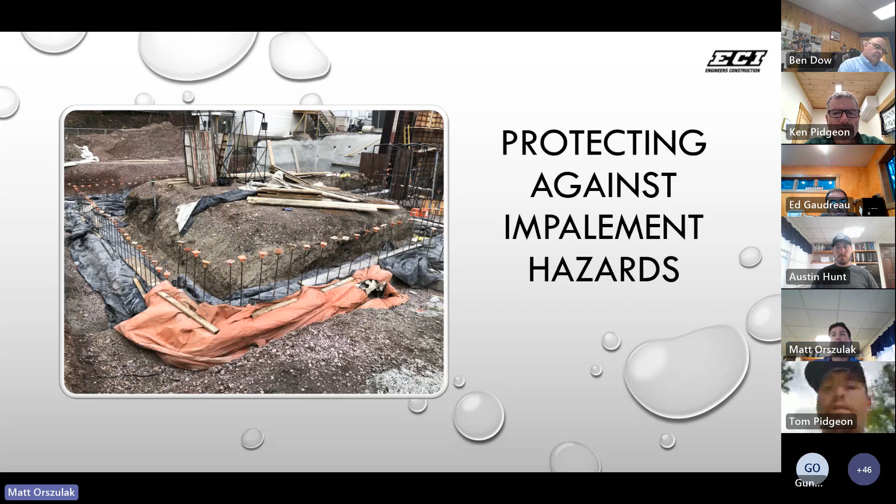So the standard, how it's written: 1926.701(b), all protruding reinforcing steel onto and into which employees could fall shall be guarded to eliminate the hazard of impalement. They changed that about 2006, where it's not just heights, it's also falling onto the same surface, whether horizontal or vertical. Rebar caps should be on the ends of our reinforcement steel. We had a couple questions come up over the last couple of weeks, so we wanted to address that even if it's a horizontal bar, we should have rebar caps on it.

And then the last standard that really applies to what we do is 1926.25(a), which applies to protruding nails, screws, and fasteners. During the course of construction or repairs, form or scrap lumber with protruding nails and all other debris shall be kept cleared from work areas, passageways, and stairs in and around buildings or other structures.

So we want to really make sure that when we're removing or handling materials, we're taking off these nails, making sure they're not protruding hazards for anyone walking or working nearby. The best practice is to eliminate those hazards by completely removing the nail or bending them over where someone can't get cut or punctured. It's an important housekeeping issue, but also hazard identification and elimination on our job sites, as we're doing so much concrete work and rebar work currently on our projects.

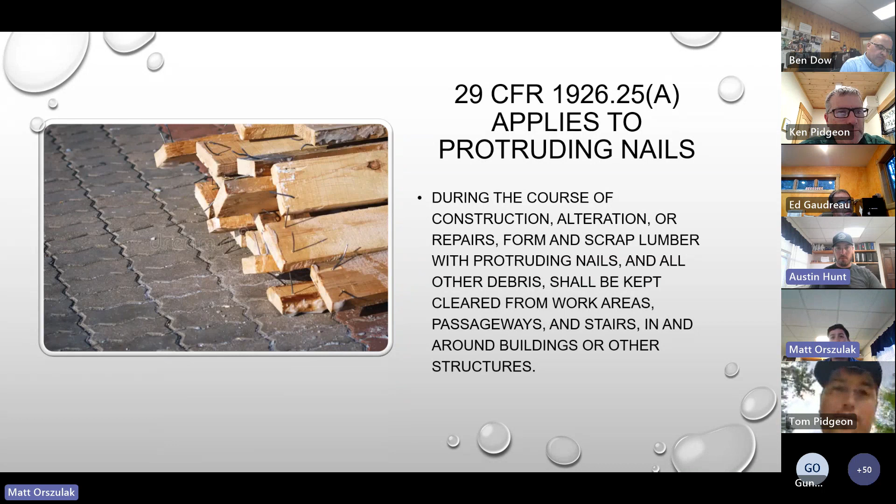Okay, can you clarify that on the horizontal rebar again? Yeah, so if it's horizontal rebar, it needs to have caps on as well, not just vertical. Because you could fall into it, a tripping hazard occurs, and if it's a horizontal bar, you could get impaled through it. So should you have rebar caps on a certain height bar, or am I not really following? There's a letter interpretation in OSHA that the horizontal bar could cause impalement.

It's kind of case by case. They said more than a foot off the ground is okay. The letter interpretation is, if you get bars coming out of the end of a slab, it's obviously less than a foot probably, and that's fine. But if it's an elevated surface with bars coming out, that's an issue.

Yeah, so it's like a tank, like in Middlebury right now we have this arched rebar, and it's about waist height, but it's horizontal at the waist height. So that's an example of an impalement hazard that we would need to have caps on.

And what's the rule? Like you see sometimes people use 2x4, 2x6 to encompass all of them and cover them. Is that acceptable or isn't it? It isn't acceptable. However, there's a little bit of gray area because it needs to withstand a 250-pound kind of drop test. So if it's fastened really strong, similar to the fall protection standard with guardrails, if it's really sturdy and fastened and it can't shift or move, and it's protecting from that potential impalement hazard, then those are in compliance.

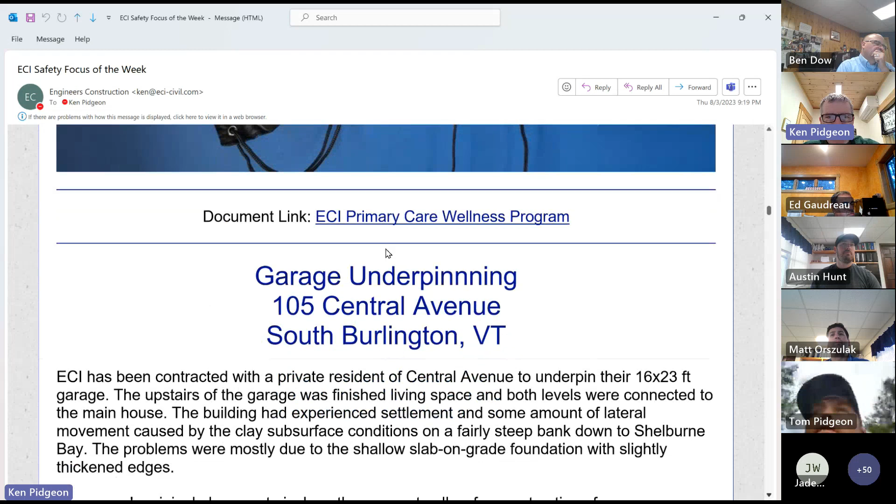And for the project of the week, we are looking at this project of 105 Central Avenue, which was a garage underpinning project. We were contracted with a private residence on Central Avenue to underpin their roughly 16 by 23 garage. The upstairs of the garage was finished living space, and both levels were connected to the main house.

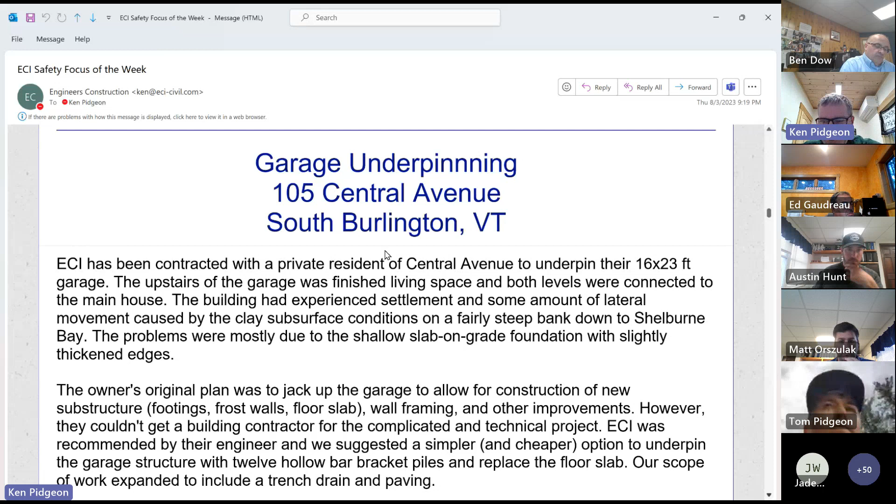The building had experienced settlement and some lateral movement caused by the clay subsurface conditions on a fairly steep bank down to Shelburne Bay. The problems are mostly due to the shallow slab-on-grade foundation with slightly thickened edges. It was just an old garage that was continually built up and improved, but it started out on an inadequate foundation.

If it had frost walls and everything, it would have been much better. So the owner's original plan that they worked out with their engineer was to jack up the garage, allow for construction of a new substructure with footings, frost walls, slab, new wall framing, and other improvements. But they couldn't get a building contractor, because it was a pretty complicated and technical project.

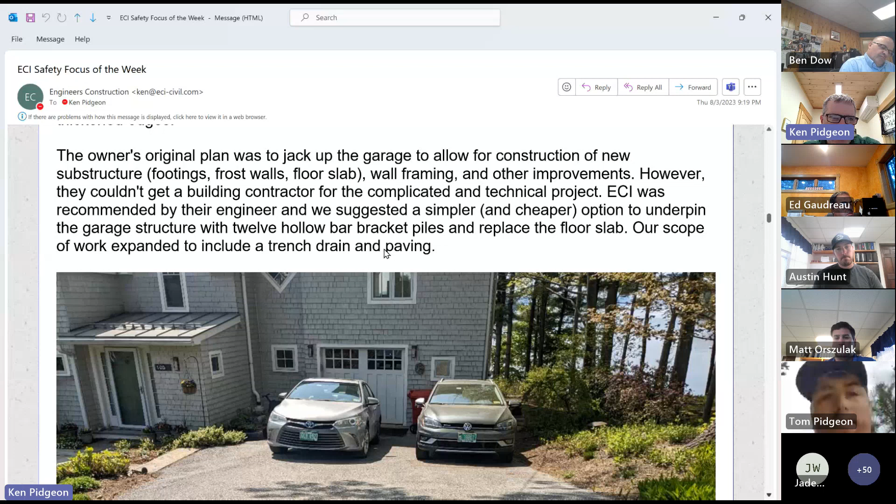It's kind of a tough area in the sense of getting down there and blending in with this really tight-knit neighborhood. So we were asked to come look at it by their engineer, Eric Goddard from Knights, and we suggested a simpler and cheaper option: to underpin the garage structure with 12 hollow bar bracket piles and replace the floor slab. Our scope of work expanded to include a trench drain and paving.

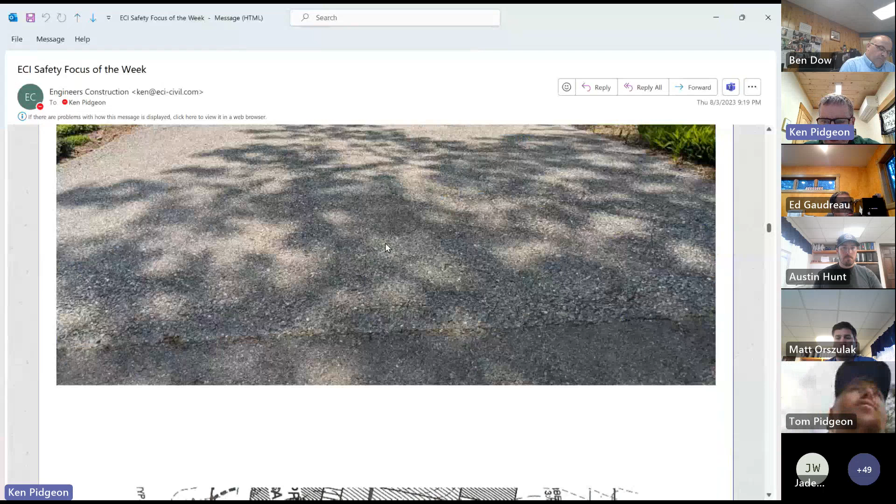This picture is before we started the project. You'll notice a pretty steep driveway from Central Ave down. So obviously there was a water problem going right into that garage, although there was an old trench drain, but it wasn't very effective. Our proposal was just to install these perimeter piles to support the garage, and you see there's a connector to the existing house.

The brackets are manufactured by Earth Contact Products and were specifically fabricated for hollow bar micropiles. We've used them before. However, the brackets are intended to attach adjacent to and under a footing of at least about 12 inches thick. Our situation had a thickened edge slab with only about 6 inches or less of edge for the bracket to engage and for spanning to the next pile.

The key to these is to have it span from pile to pile when you expose everything. An ECI solution to that problem was to attach a heavy steel angle section to the outside edge of the slab with Hilti bolts. The angle section was installed prior to digging in the brackets and helped span between these piles, despite the somewhat fractured concrete slab.

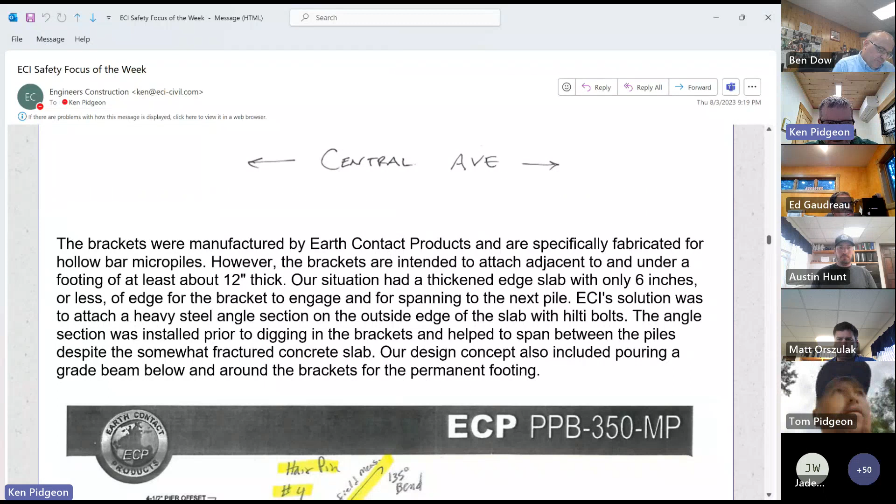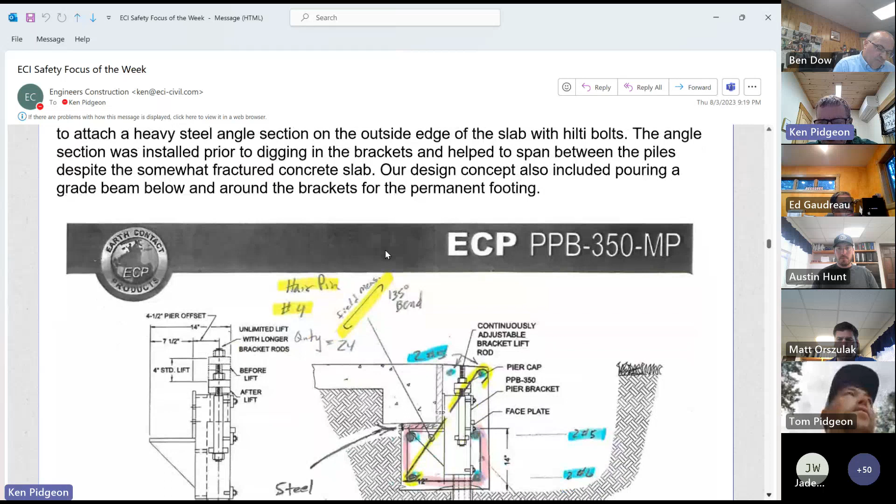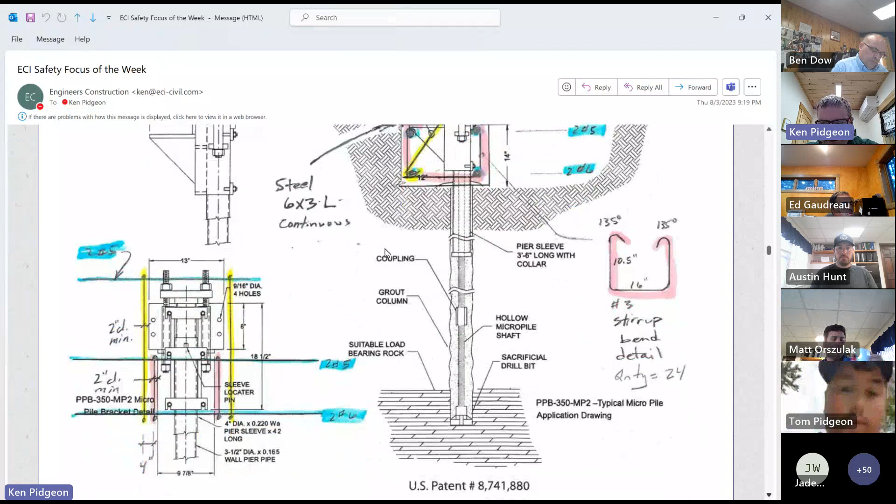Our design concept also included pouring a grade beam below and around the brackets for the permanent footing. This is a marked-up cut sheet from the supplier, and you can see we had this angle - steel 6x3L continuous - sandwiched in between the bracket and the existing footing. Then we encased everything in a grade beam. Got some steel details here.

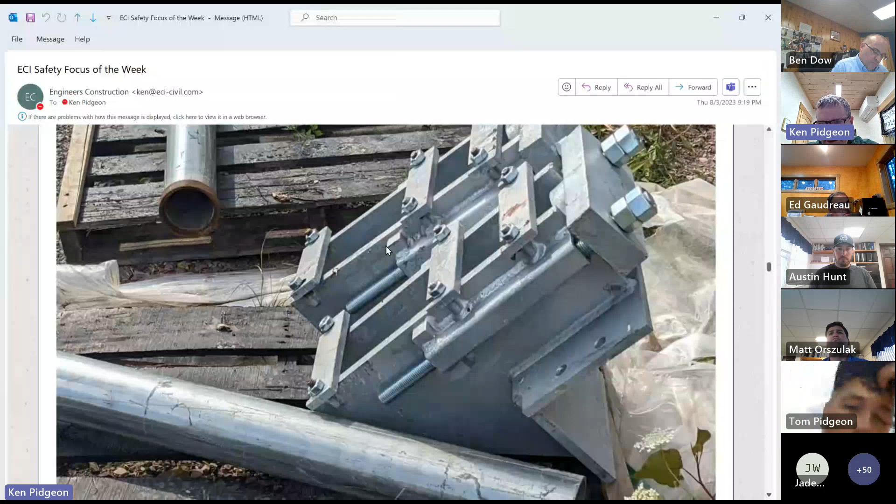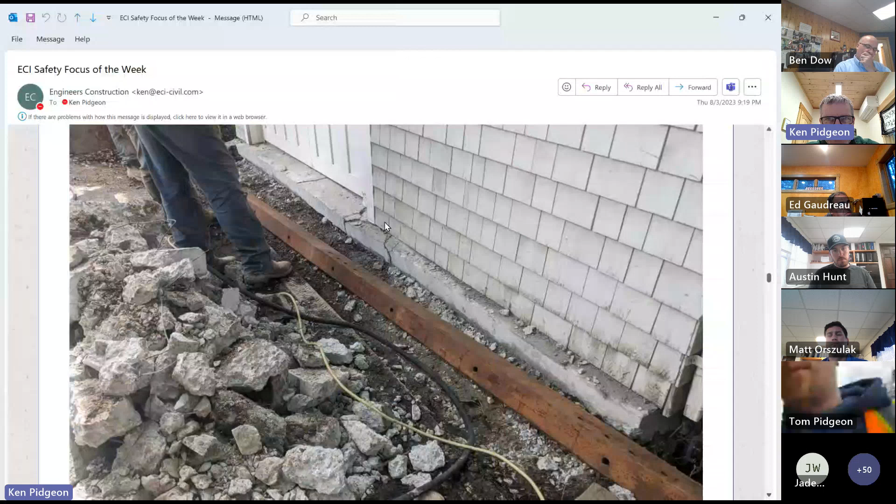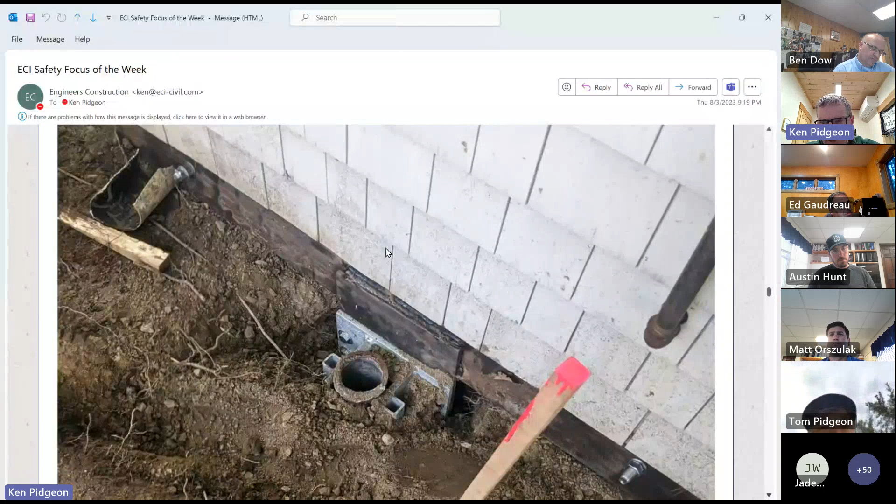This is the angle section. It had to go under the slab - you can see that broken up slab, so you'd have to span across areas that weren't very structurally good. So we put the angle bracket in there. You can see in this photo, we have the bracket installed, ready for a pile, and the Hilti bolted angle in underneath the house slab.

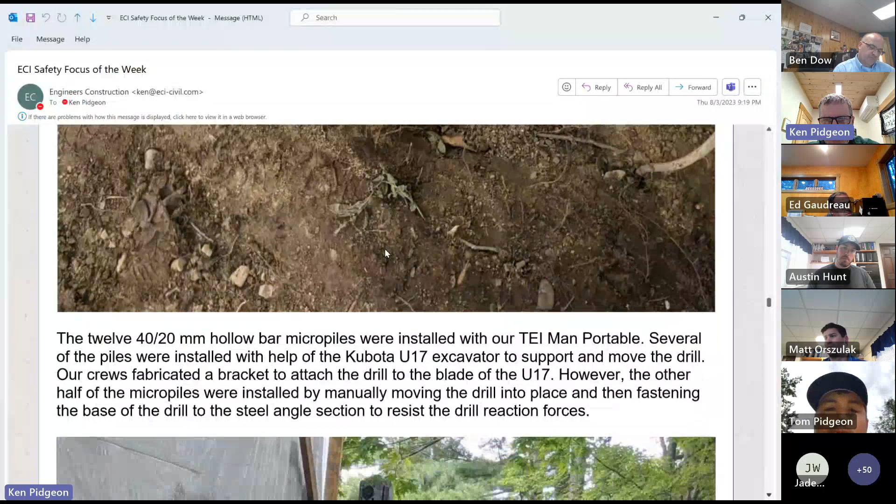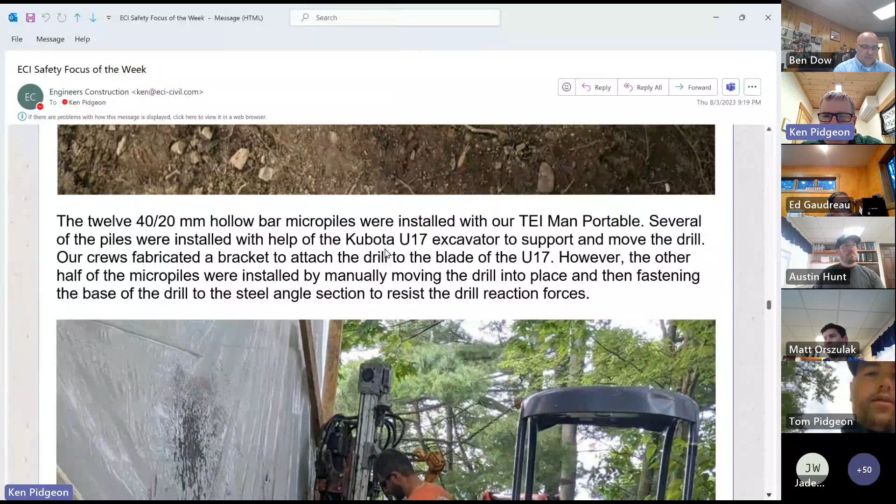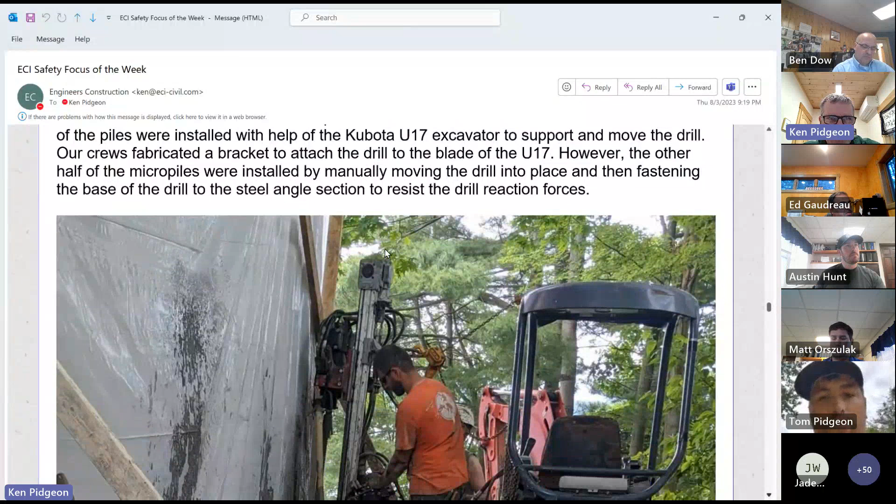We had 12 40-20 millimeter hollow bar micropiles that we installed with our TEI man-portable rig, which has a remote power pack - definitely portable, but still heavy and kind of cumbersome. Several of the piles, because it was so awkward, were installed with the help of our Kubota U17 excavator to support and move the drill. Our crews fabricated a bracket to attach the drill to the blade of the U17. That was pretty cool and good thinking.

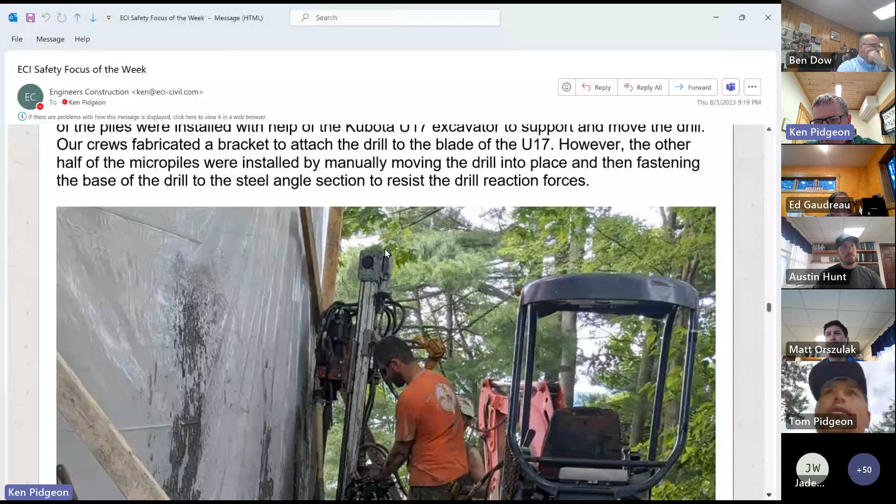However, half the micropiles were installed by manually moving the drill into place and fastening it to the base - the steel angle section - to resist the reaction forces. You'll see why in a minute, because right here we didn't have a whole lot of room, but we had enough for the little U17, drilling against that one side, the north side of the house I guess.

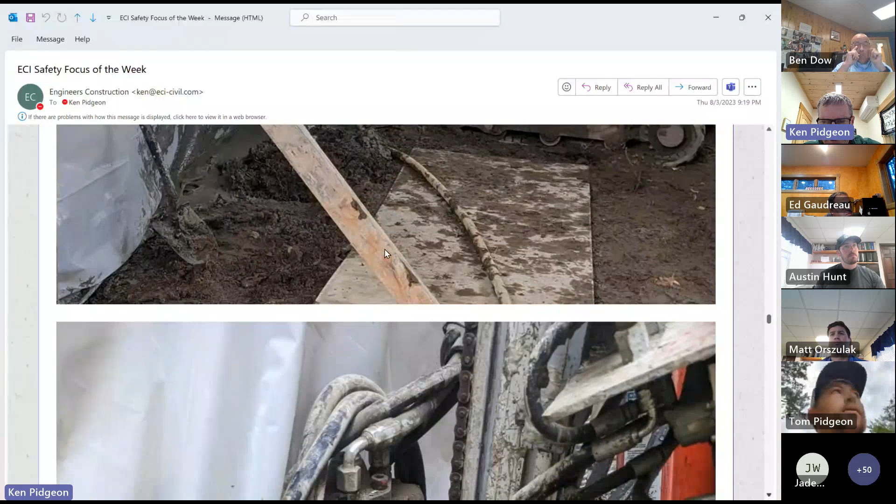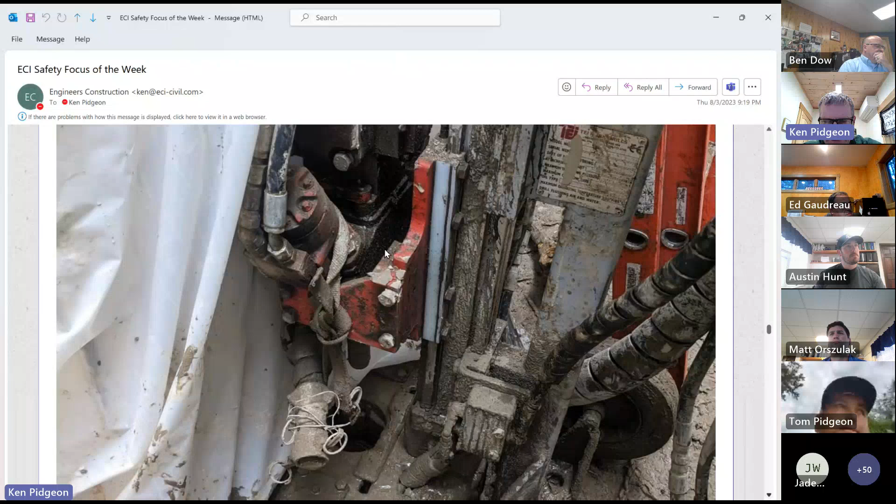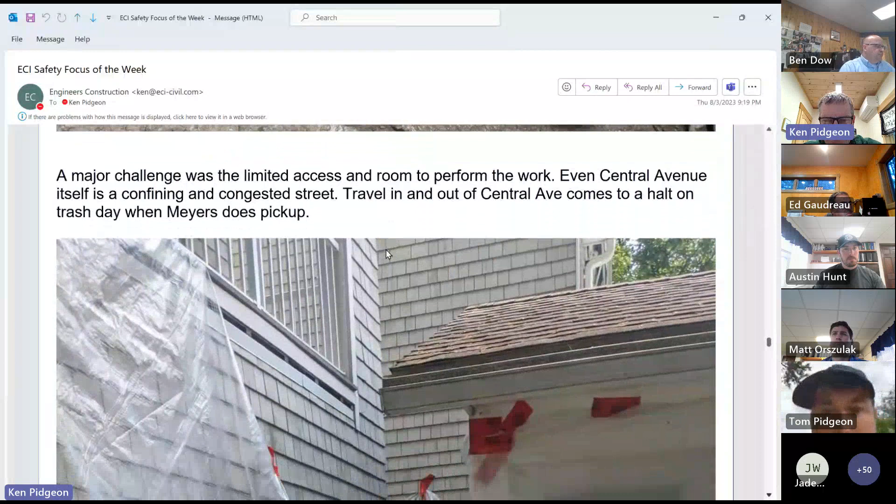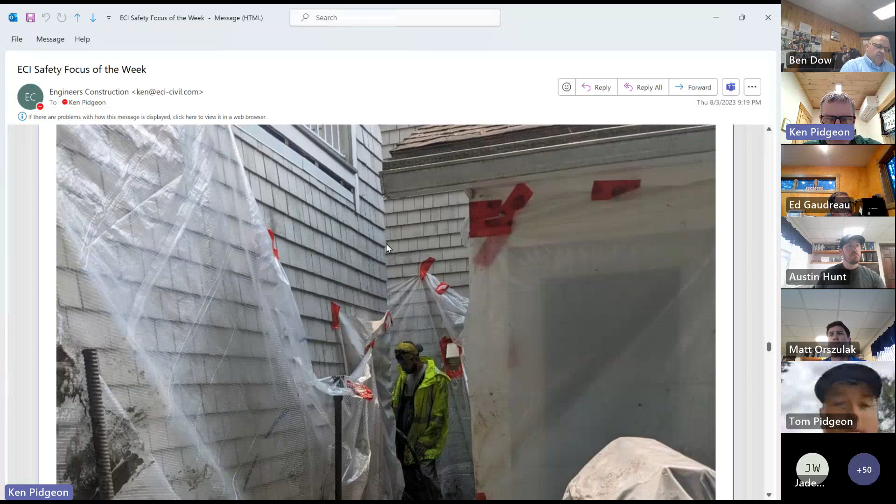Here's a close-up of how we did it around the corner, where we fastened and chained the base of the drill - see the tight chain there goes over to the angle brackets. That was done in a really tight spot between this porch area in the back of the garage, then went around the corner where Brad was standing, another 15 feet, and it was only like 42 inches wide in there to work. So pretty tight area.

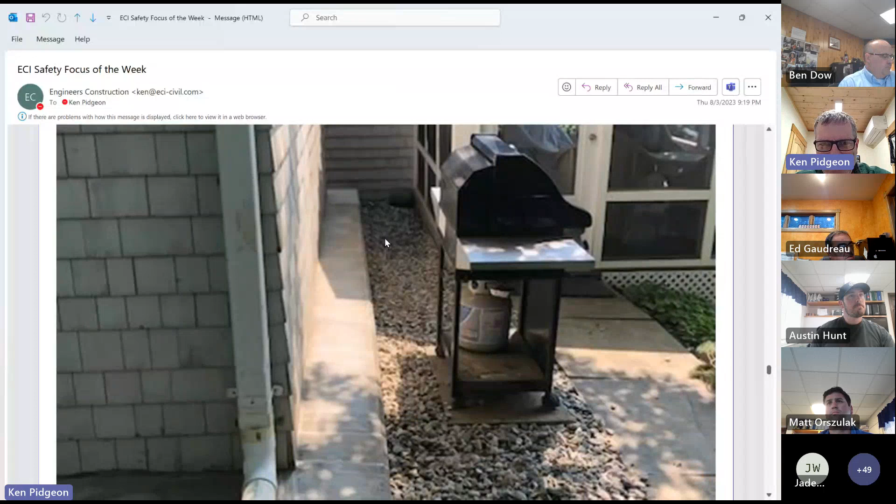And this picture here is after the grade beam was poured and everything's restored. Looks real nice, back to normal for these people. It was an inconvenience, certainly, having all this activity around their house, but they were very pleased with the outcome.

Another item of scope of work was providing 2 laterally battered micropiles to resist horizontal forces pushing the building towards the lake. These piles needed to be installed through the garage floor slabs after the hollow bar drilling and grouting was done.

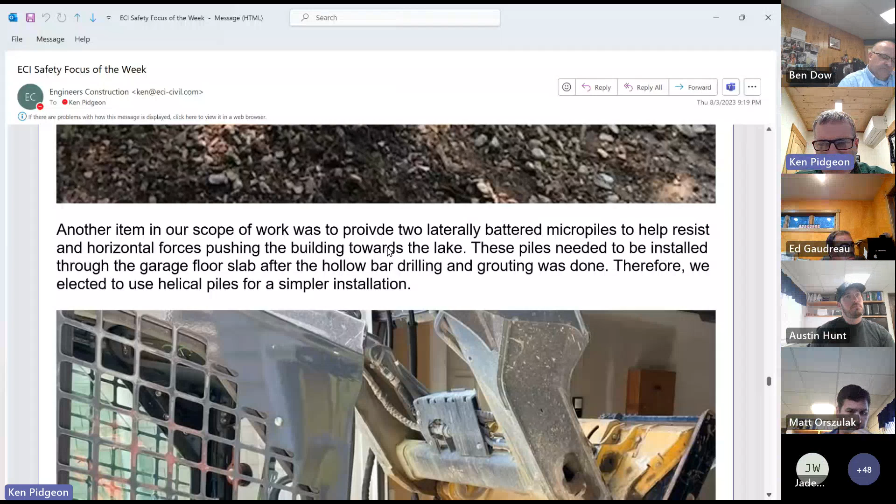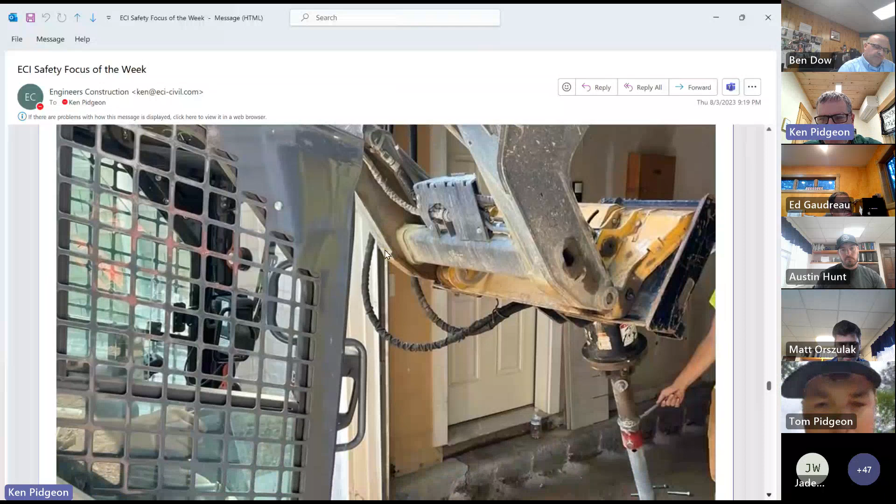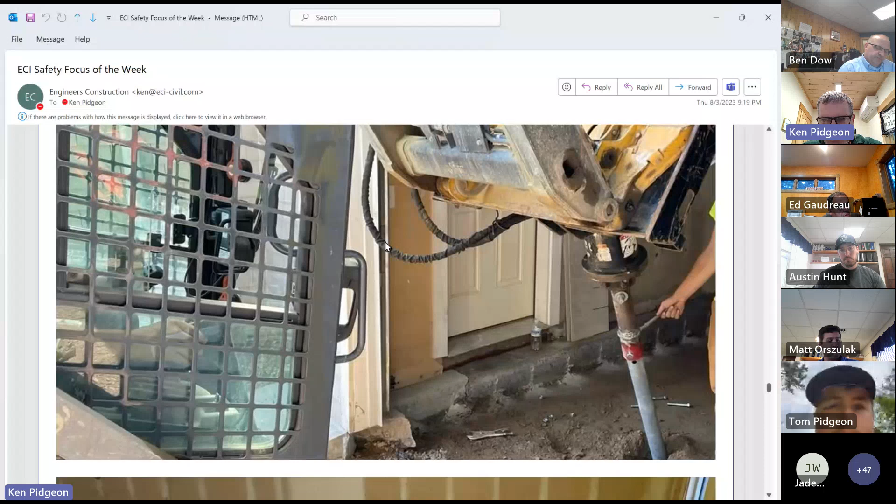It was done after all that messy work, so we elected to use helical piles for a simpler installation, and screwed the piles in, and then the slab itself transferred that resisting horizontal force around the haunch slab section, which we poured back in as a new slab. So it kind of locked everything in better for the owner.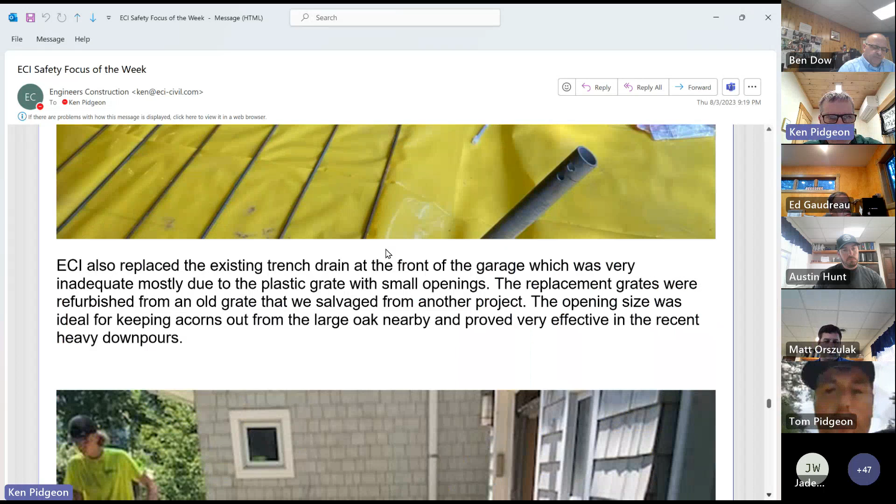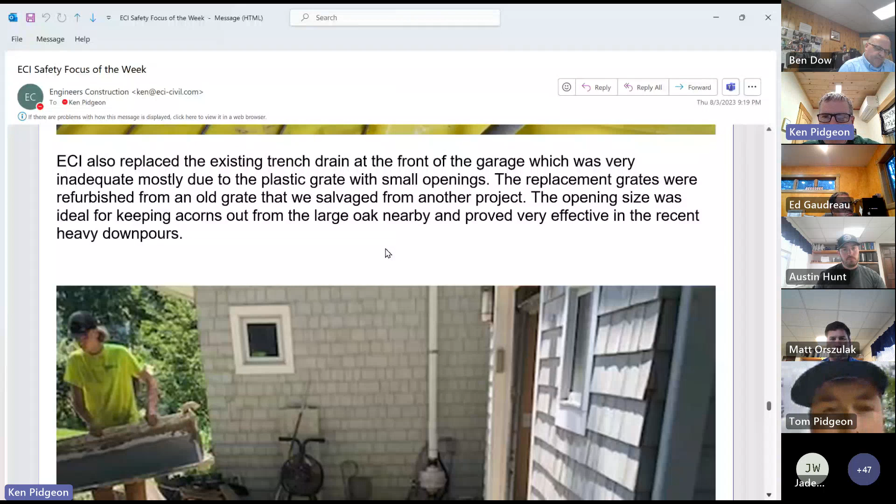And then ECI also replaced an existing trench drain at the front of the garage, which was very inadequate, mostly due to the plastic grate with small openings. The replacement grates were refurbished from an old grate that we had salvaged from another job, and the opening size was ideal for keeping acorns out from the large oak tree nearby.

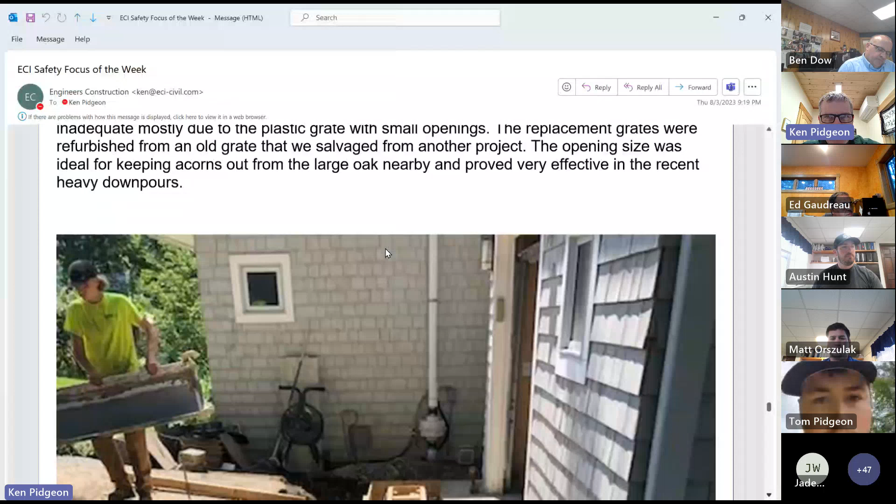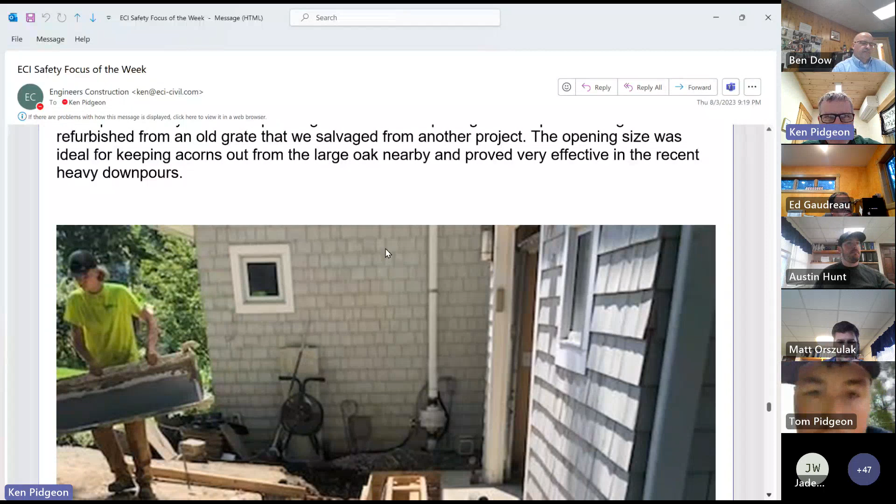There was like a very prolific oak tree, it was huge. Dumped all those acorns right on that sloping driveway, I think. A lot of them just rolled right down, made a mess. So that was part of our consideration. And it proved pretty effective in the recent downpours, the grading. So that was good to hear.

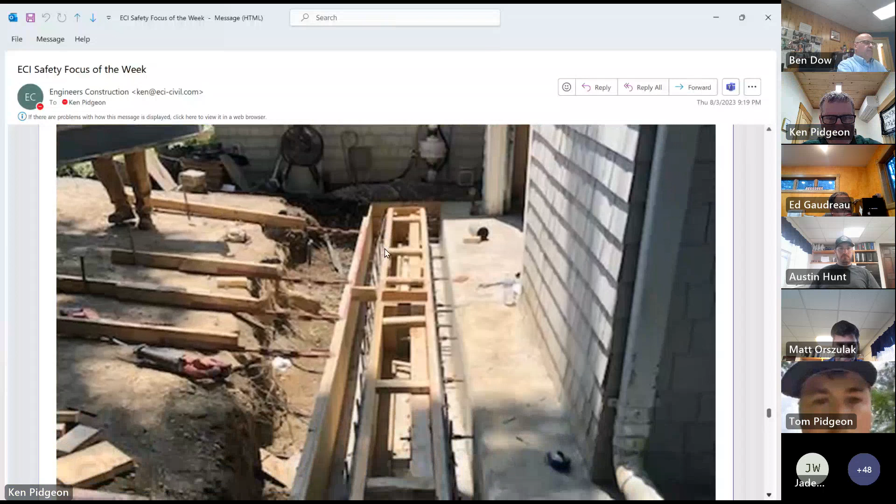There's the trench drain under construction. And then these next pictures, on the left is what they had for the trench drain, which is obviously very limited. And this is a close-up on the right of the refurbished pieces, which I think were 12 or 13 inches long.

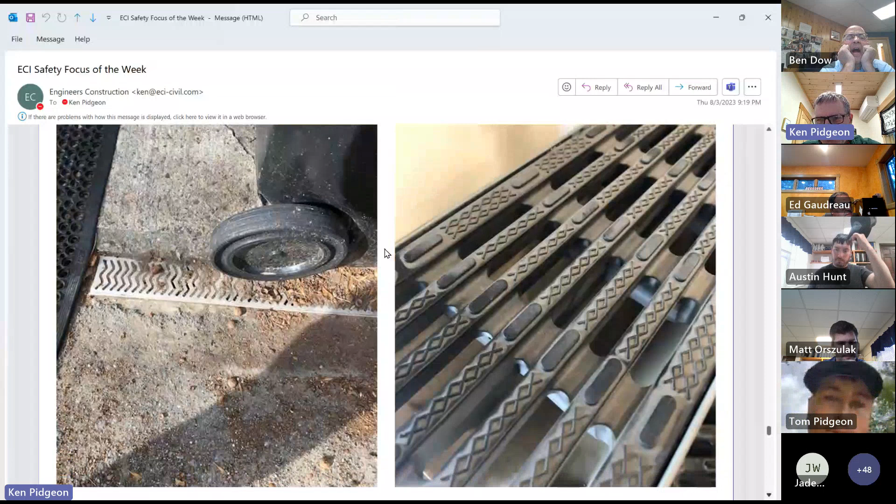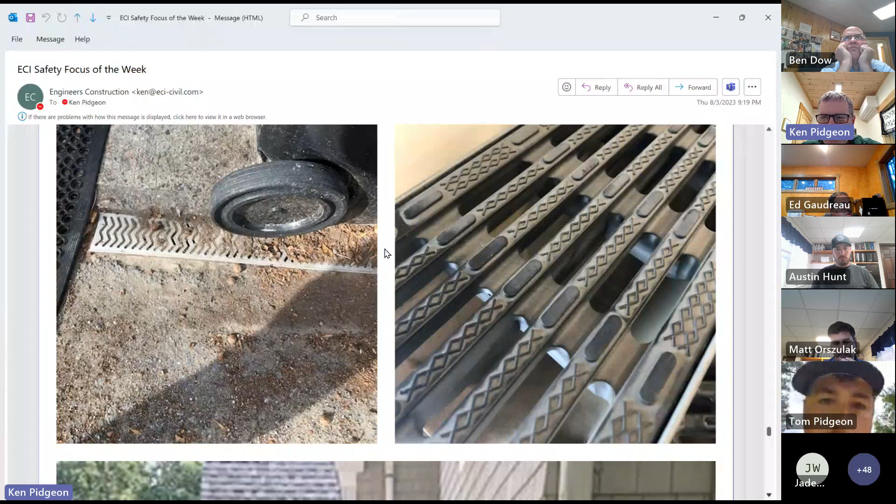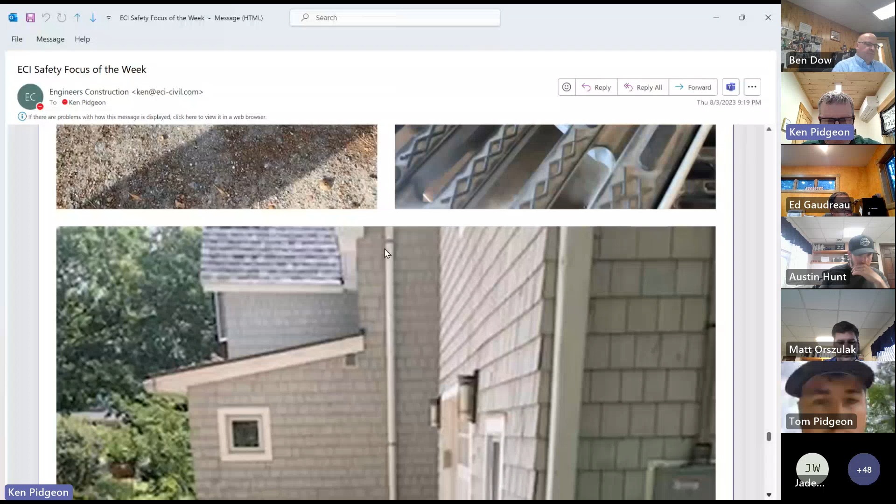We ran them lengthwise, perpendicular to the length of the trench drain, with the slots allowing the water to drop in easily and divert the water into the trench drain. This picture shows the completed trench drain with the covers on it. And all the grade beam and everything is done, just waiting for asphalt pavement.

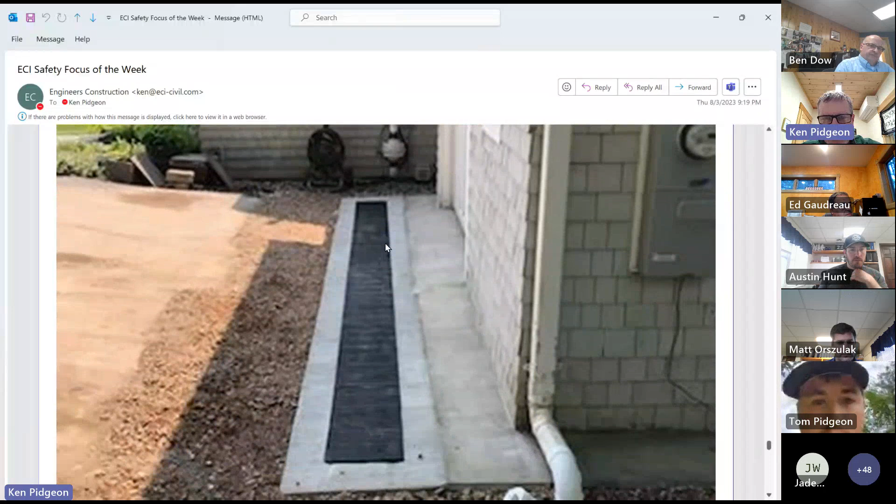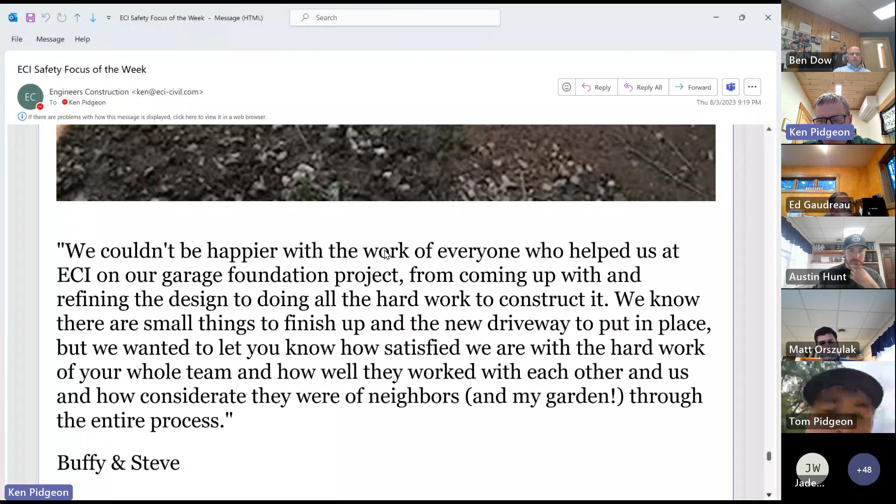This was just, I had lots of positive feedback from the owners, Buffy and Steve. One of the emails said: we couldn't be happier with the work of everyone who helped us at ECI on our garage foundation project, from coming up with and refining the design to doing all the hard work to construct it. We know there are small things to finish up in the driveway to put into place, but we want to let you know how satisfied we are with the hard work of your whole team, how well they worked together with each other and us, and how considerate they were of neighbors and my garden, she says, through the entire process.

So another cool job, very interesting, very unique. And it made the owner very happy.

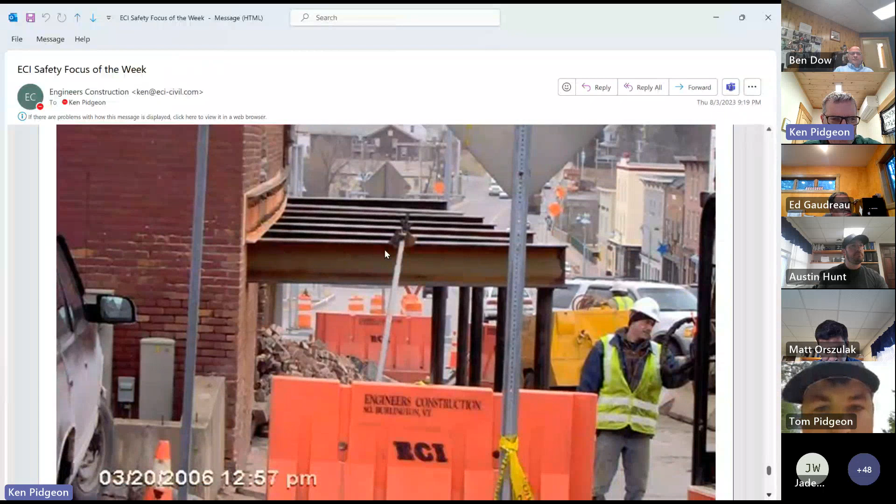Here's the photo of the archive of the week, and this is underpinning of the Niket building facade on Main Street in Winooski back in March of 2006. It was some sort of problem, I don't recall exactly. I think they had to replace some of the brick facade. It was crumbling and had lost its strength, so they had to kind of brace everything up. Some of it collapsed, and the bricks just bulged out and started failing.